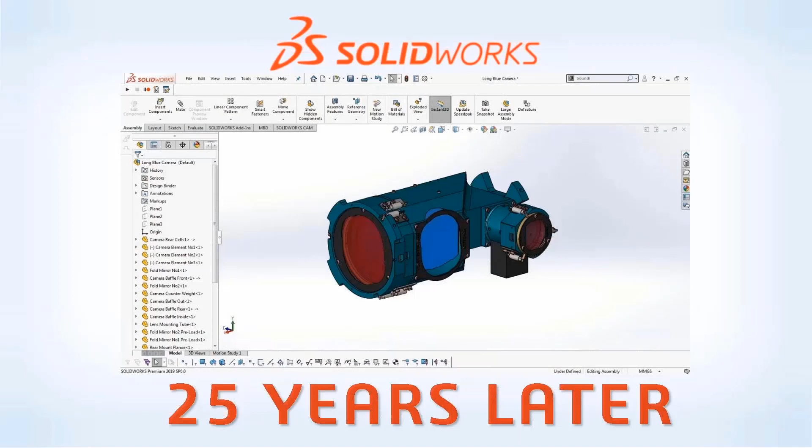In fact, back in that year, John and I were just a couple of wee little babies. Fast forwarding to now, 25 years later, we have our modern SolidWorks, a polished up, finely tuned product that is really something of an industry standard, at least in mechanical engineering, but it's found its footprint in so many other markets. So it's a great tool, but maybe it doesn't actually get everything.

You can do so much with it, but when you actually take a look at the design process, it doesn't take care of every single step in designing or product development. It really plays into just some of these steps: developing solutions, building prototypes, and improving designs. It plays a key role in testing and evaluating prototypes as well, if you use SOLIDWORKS simulation.

But for anything SOLIDWORKS simulation can't handle, as it does have its limits, Simulia will actually take over and is essentially limitless in terms of what it can simulate and what you can do to evaluate your designs with it. Pairing that with NetVibes for defining those problems and identifying some of those key opportunities where innovation can really make an impact in the market is just so crucial.

NetVibes provides some solutions for defining those opportunities and seeing those trends where they exist, to find where innovation is needed. And then, of course, product development as a whole is project-based. So for the most part, Enovia finds its way into the equation by becoming a part of every single step here, encompassing everything in defining each part of the project.

And then, of course, when your product is complete or ready to go to market for the first time or the 30th time, Delmia is there to help manage the manufacturing side of things. So all of this together is what really just makes up some of what is 3D Experience. You'll see actually has a lot more brands that we didn't even just talk about now, but just want to express how broad and how much functionality really exists in all of the Dassault System brands, all put together in this 3D experience.

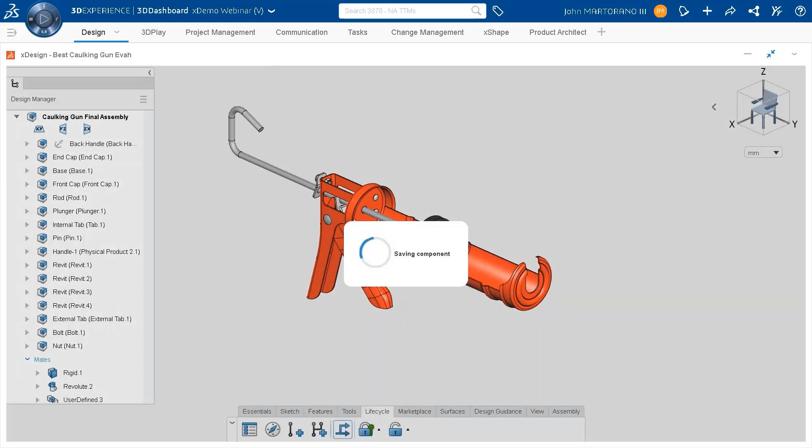As we could see, we're going to have to send it to her. Let's just start by going to the Lifecycle tab and actually going ahead and changing the maturity state. What this is basically, so nobody else gets the wrong idea here and starts making changes to a part that I'm sending in to Lisa to take a look at, I can change this state in this case to frozen, so that way everybody knows hands off, don't touch it because Lisa's taking a look at it. So I'll go ahead and do that.

Now we can go ahead and take a look at the medium with which we are going to send this model. This is collaborative tasks. If you're not a project manager, you wouldn't have the project management tools and all the dashboards and all the tasks that you've assigned. It makes it really easy with collaborative tasks, as myself, just a mechanical designer, to only be focused on the tasks that I need to worry about.

In this particular case, I only have 5 of them right here, one of which being in progress. So we can go ahead and edit this task. We could see that there's a variety of different things that I could change, such as the title, the description, priority state, if this is super important or not as important, some start and end dates. And of course, we have our assignees. Lisa was nice enough to attach some caulking gun specifications, so that way I knew exactly what I needed to do to get the project done and where I'm going to attach a deliverable.

So let's go ahead back into XDesign, and I'll click on this history button right here. When I do that, I get this caulking gun final assembly that I can just drag and drop into the deliverable section, and I can press save and click the green checkbox, and she'll be instantly notified that we have now created this caulking gun and the design work's done. So my work here is done, Lisa. I think it's your turn to take a look at it and let us know what you think.

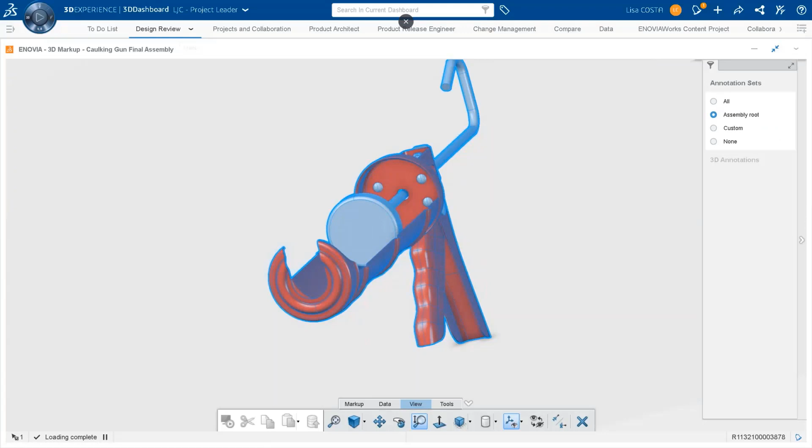Again, multiple ways to view this. We're just trying to give you a tour of the 3DEXPERIENCE platform so you can see everything there. So what I'm going to do is make sure my design review tab is set, and I'm going to get it out of there for now.

What I want to show you very quickly is that I have a separate tab for doing design reviews. This is my setup, my tabs, my desktop. So when I'm in that project management, I can grab that final assembly and drag and drop it right into that tab. That's important, a lot of that stuff is standard behavior across the whole interface for the 3DEXPERIENCE platform. One is the ability to drag and drop.

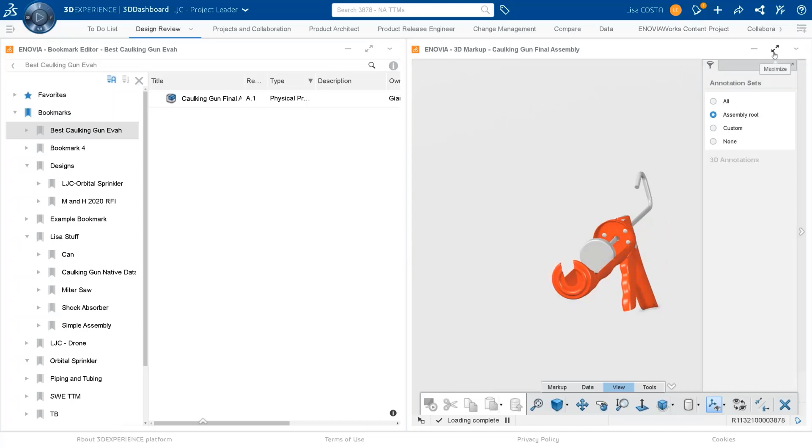And as you saw, you can even move between tabs if you want to. So I'm going to make this app a little bigger. This is an app we haven't seen before.

It's called 3D Markup. We've seen, if you've been attending any of John and Gian's sessions, that we have a viewer, and there's several viewers inside the platform, but this is more than just a viewer. It's an ability to create new data called a markup.

Again, there's a view tab, there's tools. I'm going to go to the markup tab and create a mark. As I look at this, I realize that I think we have an issue in that there's a new industry standard that requires a different size when it comes to the end cap here, or the front cap, and we need to change that opening.

So I'm going to use the markup tool so that he can be very clear on what we have to do. I think in the past session we used more of an informal type markup, which was using the 3DSwym communities, but this is going to be something official.

What we'll see in later sessions is that this markup can be the documentation for a change. In this case, I'm going to just attach it to the task, but it could be attached to something like an issue or a change action, some other of the apps available with ENOVIAworks for doing official change management.

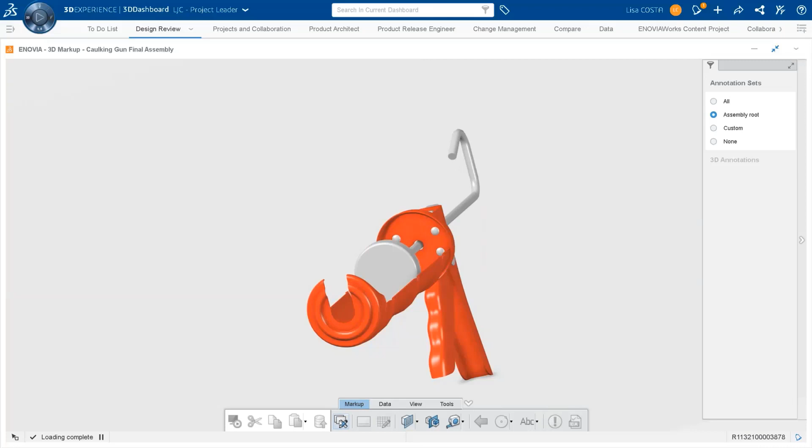So we're going to make one of these markup items. It's going to automatically name it for me, but I could change that if I wanted to. I can add a description, say specifications changed with markup typing, okay. And I'll say create markup.

So the markup tool is pretty powerful. What it does is create several slides. You can imagine this is a pretty simple assembly, no offense John, it's a pretty simple assembly, but if you had a very complex assembly, ouch.

If you wanted to take several close-up views, if you need to do cross sections, you could compare it to another item and show some differences. In my case, I just wanted to show real quick that there can be multiple slides. Here's just the general view.

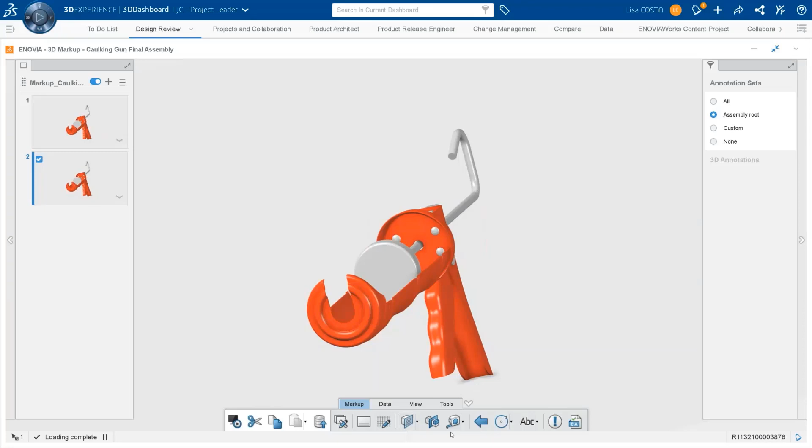Here I want to actually make an edit, so I said compare, cross sections, things like that. I'm going to just create a dimension of the circle here. That looks good - it behaves like a regular dimension, and then I want to add some text, and that text I'm going to grab here.

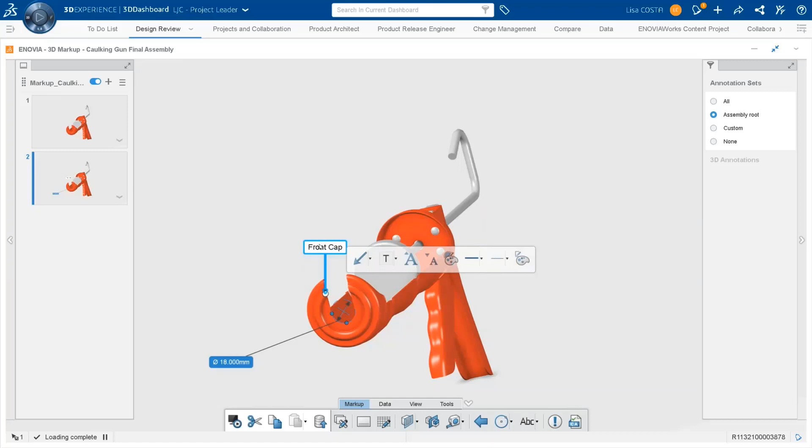Some of the automated behavior I want to show you is that as the engineering manager, I don't need to know what the name of that item is. I'm actually in the top level assembly, but because I picked that call out to go to that item, it actually filled in some of the text for me, which is nice.

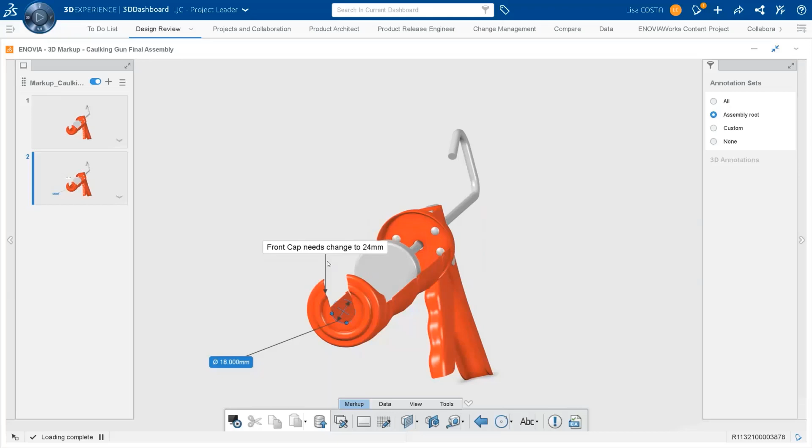So I could overwrite it if I want to, or I can add to it. It needs to change to 24, right? You can do as much detail as you want to mark this up and give him all the detail that he needs to make this change. So I'm going to assume this is good enough for now, that he knows it's currently 18 and it needs to go to 24, because the tubes in the caulking gun industry have changed. This is the save command we've seen before when John was doing that with his design.

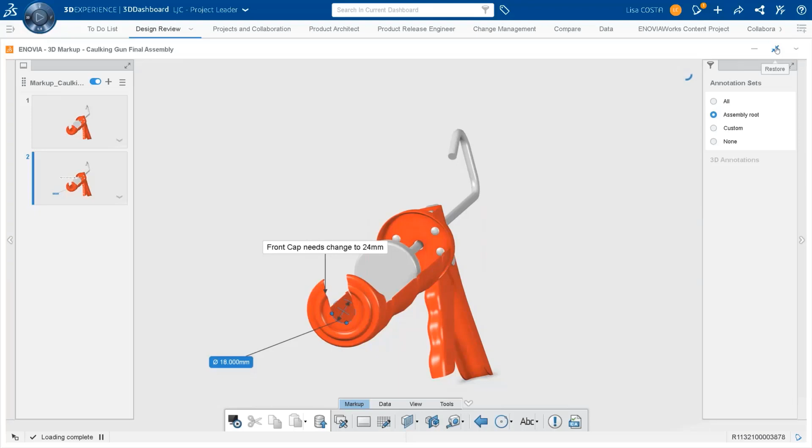So this is an item type, right? The markup is an item, so I've saved that markup. I want to go here and close that down. I wanted to show you that ultimately it is a type of item.

It can be added to a bookmark, and more importantly, I want to add it to this task. Not only that, but I want to change that task back to not done, but in progress. A couple things to let John know what's going on. I'm going to change the task back to in progress so he knows he still has to work on that. And then I'm going to go over here and add another attachment, which is the markup itself.

So I'm going to search for my markup that I just made, using the regular search we use across the platform. I want to make sure I do an overall search, not in the current dashboard, and search within my recent content, not across the board. Again, you can use 6W tags.

In this case, because the demos move fast, I want to get something within the last 5 minutes. So I'm going to grab this, drag and drop it, and put it right in here to the attachment.

Again, when it comes to these tasks, whether you make them manually or they're part of a project, the attachments are the inputs, right? So I want him to use that as a reference to make this change. And not only that, so that I know -- we've probably seen a lot of collaboration already.

If you've been following John and Gian's series here, what I want to show you is there's also collaboration available on the tasks themselves. So I'm going to call out John and say, please see markup for details on a change we need to make. And save that, send the comment off, and close that down.

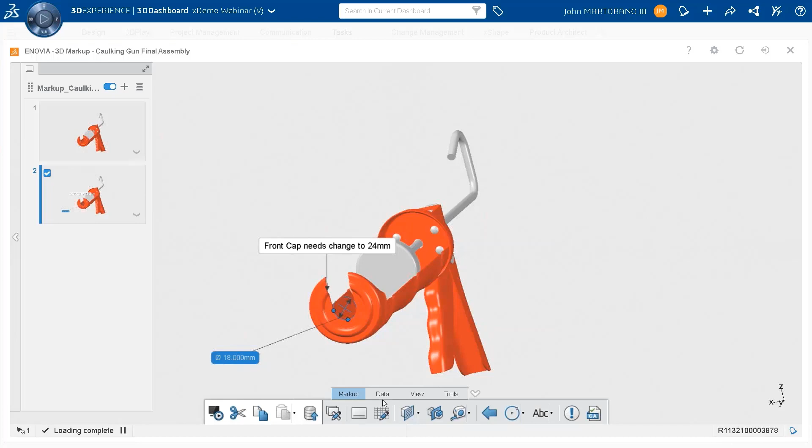So let's go ahead. Slave driver. That's what I am.

Yeah, it'll be easy enough to do this one. You gotta maybe give me more of a challenge.

So what I can actually do in this case, I could search for my model and open that back up in XDesign. But in this case, what I want to do, I can just drag right from the deliverables tab into XDesign and open up that model.

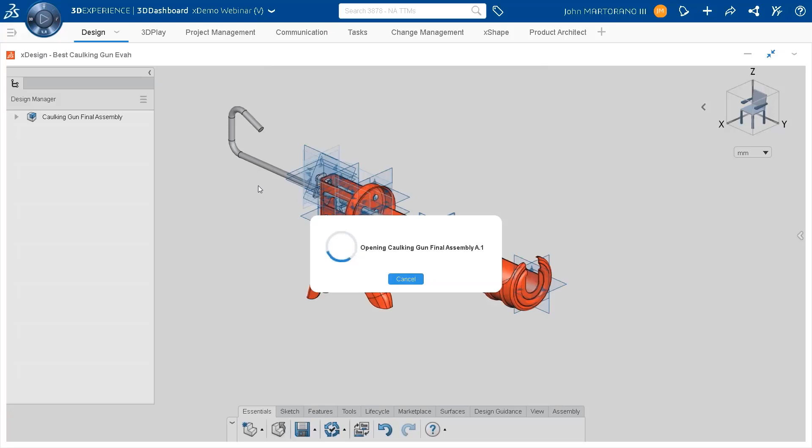Now, we talked about how this was in the frozen state. Let's go ahead and bring this back to in work. So to do this, we do this the same exact way that we previously did, change our maturity state. Our options are presented in the drop-down menu. So right now it's in frozen, so I have the option to change it to in work or released. I'll press OK in this case.

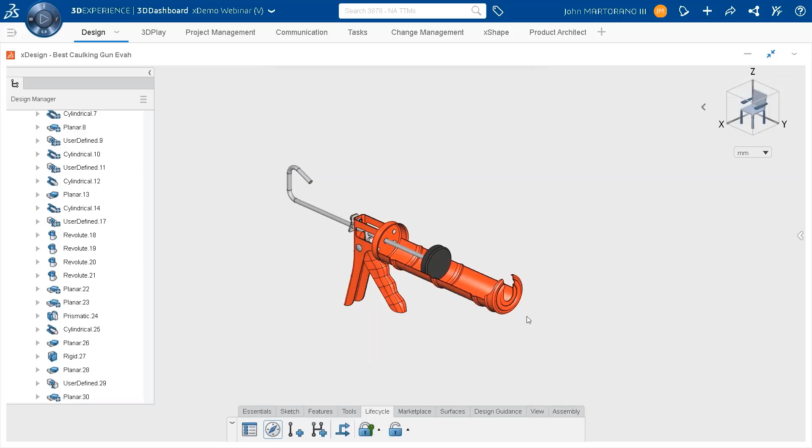And we're all set there. So maturity state, all set. I'm ready to get started and make the change. Obviously, this is the part we need to make the change. So let's go ahead and just edit the component right in context of the assembly. It highlights the component for me, and I can just now choose the feature that's responsible for this cut right here.

Okay, so it looks like I defined it by a radius. And it was 18 millimeters, obviously, because 18 divided by 2 is 9.

Well, if I didn't know, and I didn't know what 24 divided by 2 was. Because it's a long weekend, it's Monday morning, maybe I just don't know what 24 divided by 2 is. Hard work in college really paying off.

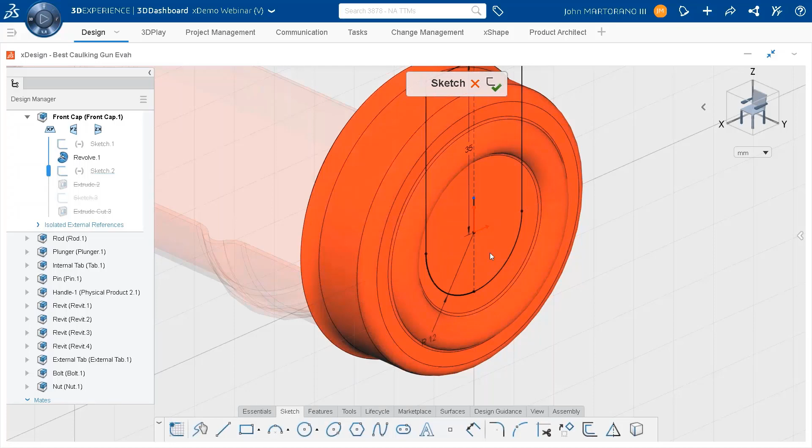Yeah, but luckily, just like anything, 24 divided by 2 can be done right in the toolbar itself. John and Gian don't remember why that was exciting, but when SolidWorks first came out, being able to do the math right on the input was a big deal. So we still have it. Yay! We were babies until that came along. That's right, that used to be a standard part of the SolidWorks demos back in 95, 96.

Look at this, you can type it right in here. Don't have to open up a calculator. SolidWorks has been doing long division since before Gian and I were born, so.

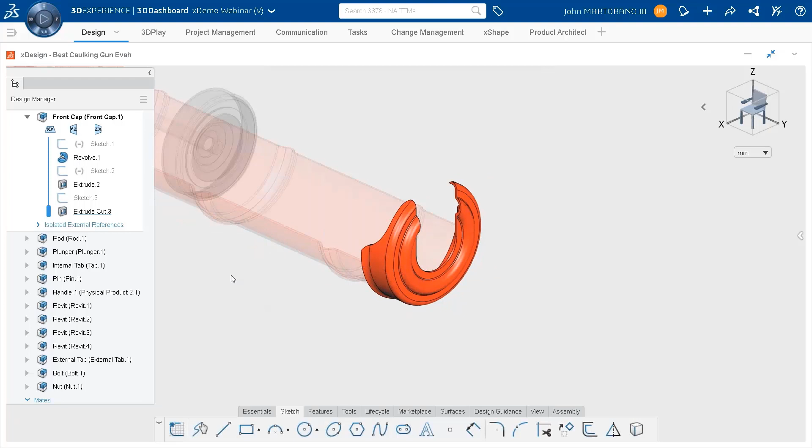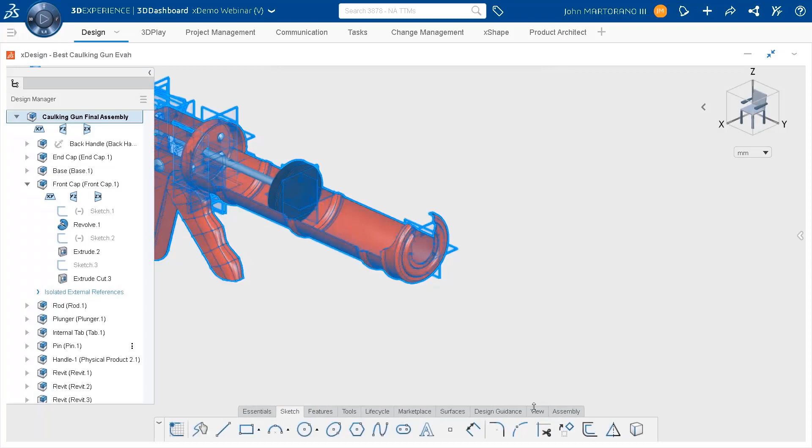All right, so now that we've made this change, we can jump back out to the top of the assembly. And luckily for us, it's pretty simple from here on out because we actually don't need to reattach a deliverable, since that deliverable is going to update automatically for us. So in this particular case, all I need to do is just save my component. And we can go ahead back into the lifecycle tab and change that maturity state back to frozen because we're about to send it back to Lisa.

And now let's go back into our tasks. Instead of just clicking the green checkbox, which would do the same thing that dragging it into done would do, it's just much more satisfying to come in and actually just drag from in progress to done.

And now I'm going to hand it back to Lisa again to make sure that those changes are up to her standards. So Lisa, sure you don't want to make a comment? Do you want to send me a smart comment or anything? I could, yeah. I'll make a comment saying that I think this was too easy, and maybe you should step it up next time. That's right.

All right, actually, you know what, I'm showing my screen now. If you made a comment, it would pop up as a notification for me. So that would be kind of cool, actually, to show it live. Yeah, I just sent a comment. Cool.

And now it's done, that's all it is. So again, I see John's comment, and again, we do use this internally to run our internal projects. So there's lots of times that we have comments back and forth about a task. Sometimes it's not just straightforward, sometimes people have questions. I've actually commented on one before and said, 'Why is this assigned to me?' So sometimes they're like, 'Oh, that's right.' So I was kind of like, 'I can't do this.' So anyway, but yeah, so the comments do get notified. So as the project manager, I get notified of that because he called it out to me. If you're an assignee on a task, you see those comments as well.

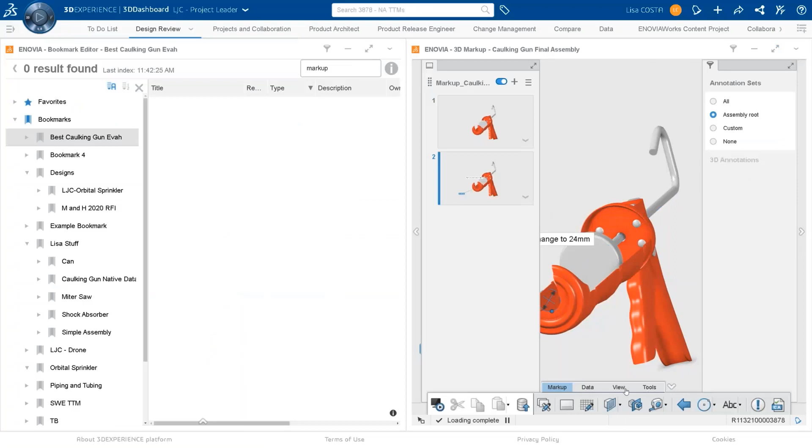So I'm going to go back into our Create Mechanical Designs task. Just double click and open that, and edit that. I want to grab that same deliverable and bring it over into my design review, but I want to make sure my design review is empty first. So let me go to view and get rid of the old one with the old markup in it, and grab it and drag it over there into my design review tab.

I could have opened it just with a regular viewer as well, but I just want to verify, yes, that definitely looks like it's 24 millimeters. I could verify it with the dimension if I want to make sure I really did it right. But I'm going to say I trust that John has done that correctly, and I don't need to actually measure it at this point.

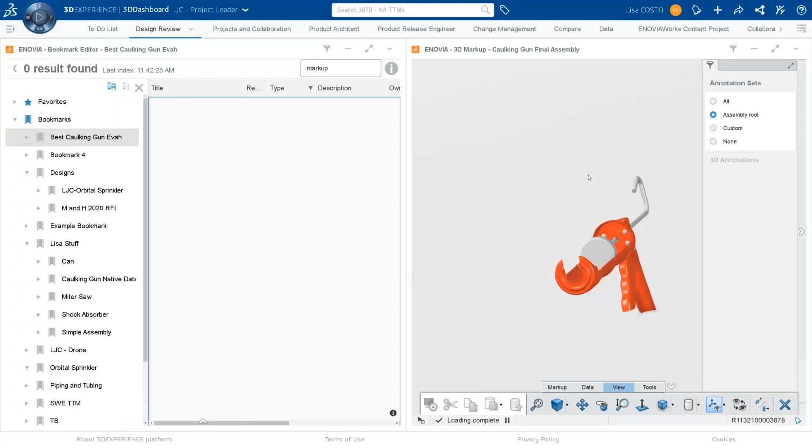So again, just bringing things back home, and I'll hand it over to Gian to wrap up. Using things like markups, documents, the design elements themselves, and bringing in process, life cycle, tasks, projects where we can see dependencies and how our project is progressing, is all part of more than just, as Gian pointed out, more than just design tools. It's also about being able to bring real product life cycle management and product data management tools to our SOLIDWORKS users.